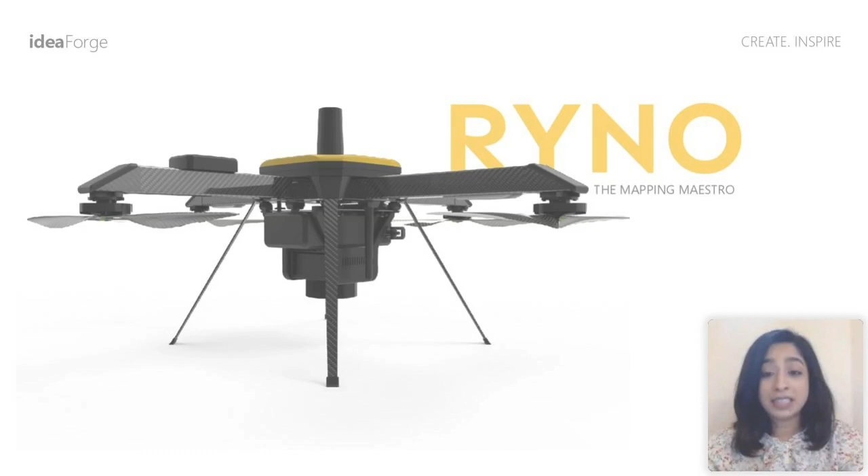Welcome once again, everyone, to this very exciting launch for us. And when I reflect back, I look at the timeline way back in 2004, when we had created our first quadrotor drone as an exciting, innovative, and fun project while we were still college students, to the next few years where we set out to prove that such a technology can be created by people right here from scratch.

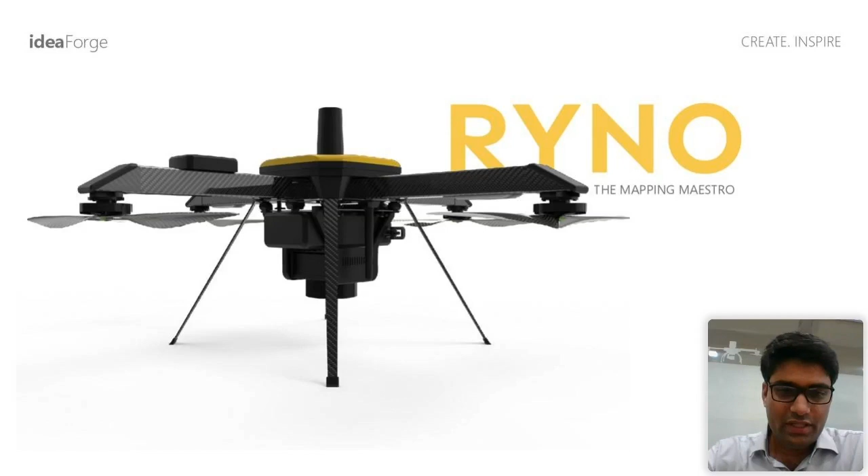But in 2008, when the Mumbai attacks happened on 26/11, it ignited a passion in us to use this technology to create a difference in our security operations. Over the next few years, ideaForge pioneered and delivered several class-leading performance products to various forces in the country. Almost all of the forces have adopted our indigenous solution, and have been successfully using it in over 140,000 missions for their operations. Several missions have been wildly successful in creating impact for our forces.

When we were looking at the next frontier for us, we realized that there was a burgeoning demand for survey-grade mapping drones.

And when we investigated that further, we came across a very exciting study done by a very famous Peruvian economist, Mr. De Soto, who mentioned that the development of several modern economies is going to be dependent in a big way on how well digitized their land records are.

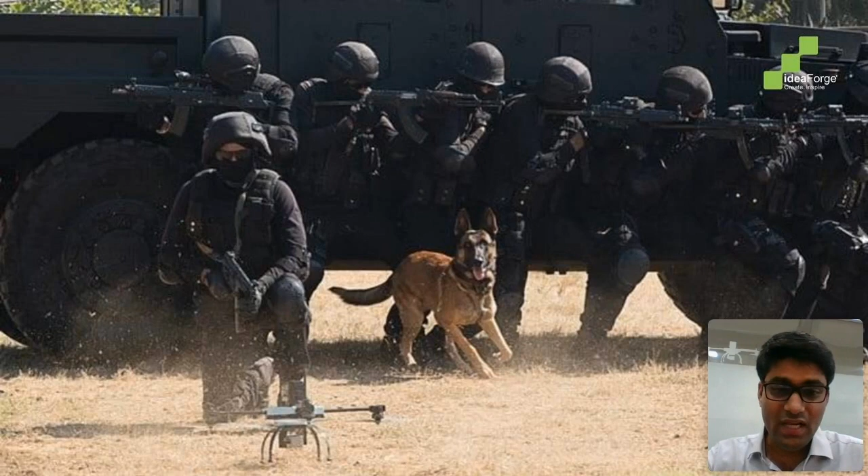And when we saw the impact of this technology, we knew that this was the path we had to choose next to create impact. It is one of our core values at ideaForge. As a result of our dedicated effort over the last 6 to 9 months, we are proud to present our mapping maestro, RYNO. I would now like Rahul, my colleague and co-founder, to share what makes RYNO special.

Hi, welcome back. Thank you, Ankit, for the narration so far. What I would like to do is start by talking about the design philosophy behind the product RYNO.

As Ankit mentioned, this was a realization that there was a latent demand for a high accuracy, survey grade mapping drone, which could be made small enough, accessible enough, portable enough so that our target user is able to achieve its mission flawlessly, scalably, reliably, repeatably.

With that mission in mind, we had to dabble with the challenge of making something that was regulatory compliant, achieving consistent high accuracy performance as the user required, and while doing so giving scaled performance so the user was able to do more of the mission required, because what the Survey of India in our country is targeting is nothing short of phenomenal in terms of a goal. So we worked around this problem and came up with a product.

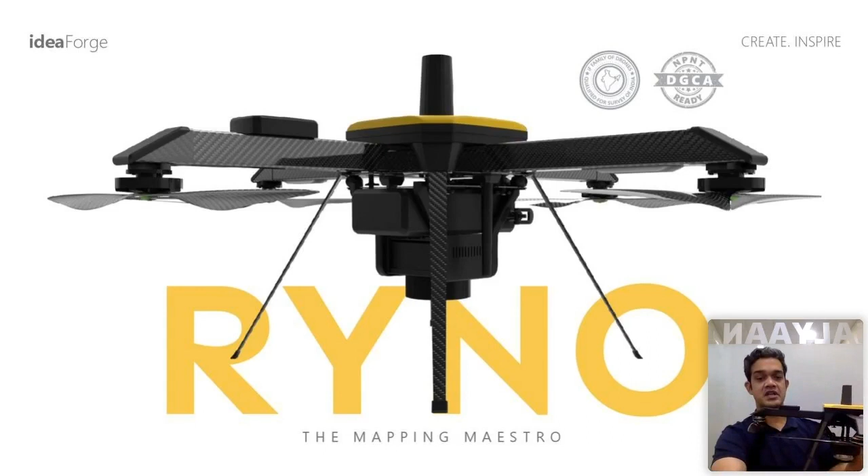And I would also like to show you the physical incarnation of the product RYNO, probably one of the only RYNOs in the world that I can lift so easily. But jokes apart, this is a sturdily built product. I would like to walk you through some of the specifications of the product.

I'll bring back the equipment wherever I need to give you references of what this product represents. So the product, in terms of broad specification, is an under 2 kg product. As per Indian regulations, that's classified as a micro UAV. The advantage of a micro UAV in the Indian operational environment is that as long as the user is operating it under 60 meters, there is no UAOP requirement.

Because of that, more operators can scalably do this without necessarily going through the additional step of obtaining a UAOP. At under 2 kgs, the product still does not make the user compromise on any of the performance parameters. The product can fly for more than 40 minutes at one go.

While flying for 40 minutes at 60 meters AGL, at 80-60 frontal and side overlap, the product can easily cover an area of 0.6 square kilometers or more. For users who have a UAOP, or do not have the restrictions of the Indian regulatory environment, or for international users, while flying at 120 meters, the product can easily cover more than 1 square kilometer at one go.

And while achieving all of this, it's always assuring accuracy of less than 10 centimeters in the horizontal axis and less than 20 centimeters in the vertical axis, with a 95% confidence interval. That 95% confidence interval means that if you have large data sets, no more than 5% of your data statistically will be outside these assured error percentages. What that means for our user is being able to do scaled operation without doubting the quality of the data achieved.

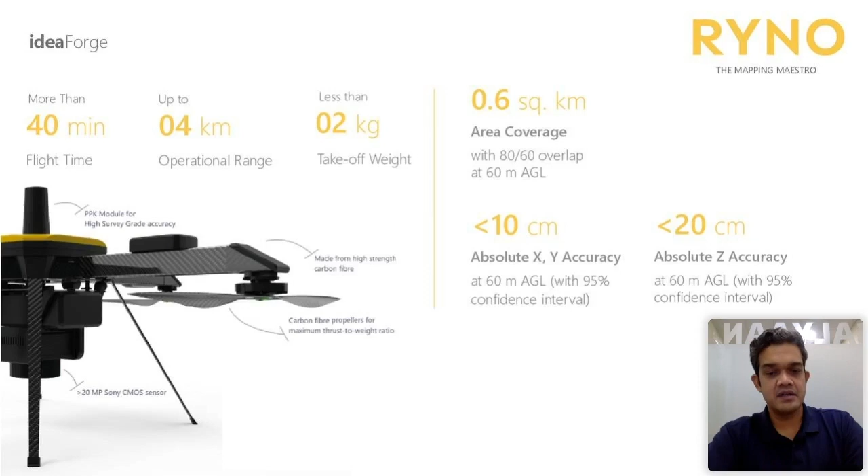Going ahead, I'd also like to highlight a bunch of great features of the product. The ideaForge family of survey-grade mapping drones, not just in the micro category but also the small category, are qualified by Survey of India to meet the stringent accuracy and repeatability requirements.

That means any customer, be it private or public sector player, can take this tool and produce data which is consistent and compliant with the requirements of any stringent agency.

The product also offers best-in-class area coverage. Because of the phenomenal endurance for this size class, the product is able to cover the maximum possible area for this size of UAV with this configuration. The area coverage can be flexibly increased for advanced users who want to play with overlap percentage and other parameters to maximize area coverage.

The accuracy that we assure, less than 10 centimeters horizontal and less than 20 centimeters vertical with 95% confidence interval, is a high confidence metric. But for a user looking for an average or typical accuracy, the same accuracies can be as good as less than 5 centimeters horizontal and less than 10 centimeters vertical.

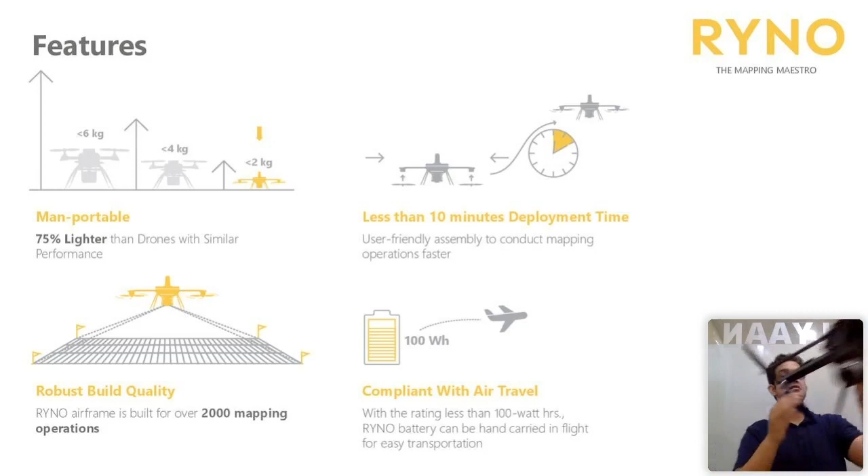The materials used in the product include an extensive amount of carbon fiber composite. In addition, there's a lot of magnesium and aircraft grade aluminum used to construct the product. All these materials are of the highest grade globally in terms of any product.

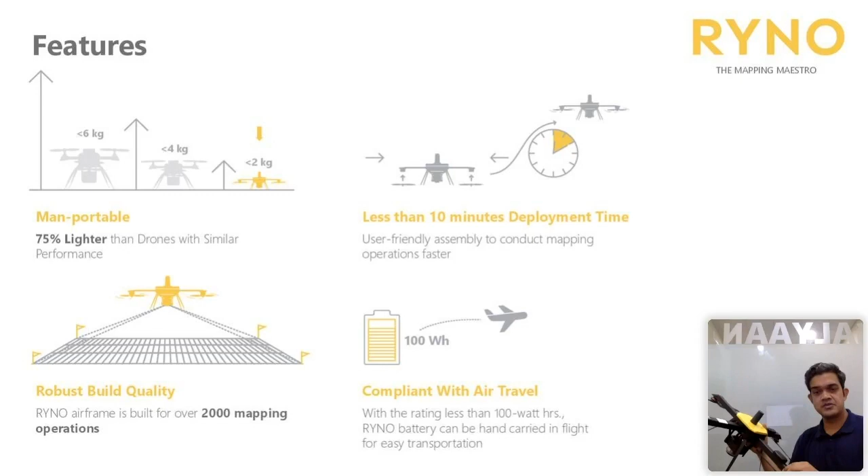That means, compared to a lot of plastic constructed commercial products, the product that RYNO makes can last much, much longer while assuring reliable and repeatable quality of output.

We assure technical life of the product as long as more than 2,000 mapping missions if the right engineering support package is followed and subscribed to. We also extend technical life support for many years, up to 5 years, depending on the engineering support package chosen, meaning the investment into the product is future secured by an assured lifetime technical support of up to 5 years or so, which no other commercial grade product typically offers.

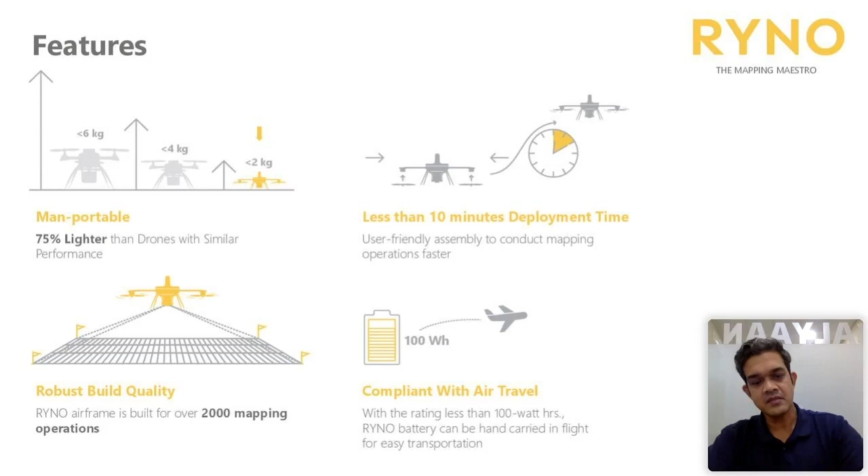While assuring high cycle life, high reliability and robust construction, we also provide very extensive and easily accessible customer support and warranty support for the product. We have pan-India operational support available, so most likely our nearest support center won't be too far away. The warranty package is typically 1 year, and beyond that, users can choose different AMC and support packages to suit their needs.

The product also takes into account the need of the user to travel between various mission areas by air transportation. So the main aircraft itself is made to be easily checked in. And as we all know, batteries are not allowed to be checked in by airline authorities, so the batteries have been constructed to be compliant and can be carried in cabin with you, allowing hassle-free transportation by air.

Further to that, we want to highlight the importance of a VTOL quadrotor configuration and its advantages compared to a fixed wing or hybrid configuration. The VTOL configuration offers tremendous flexibility in area of operation. The size of the deployment area required is minimal, increasing mission deployability significantly. In addition to launch and recovery flexibility, users also benefit from flexibility in flight.

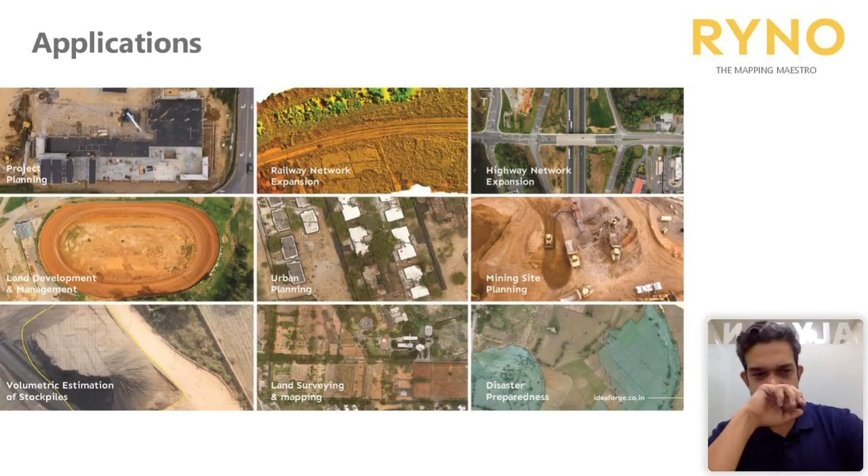Hi, thank you Ankit. So when we talk about the product being built for user's mission, we also need to talk about what the mission is. Broadly, the outcome of the drone flight itself is not a great video or entertainment—it is the data coming out of the drone, and the high accuracy data we assure is produced by essentially understanding the mission requirements.

So I would like to capture the mission requirements as, one, data processing, and the other, data capture. Data processing requires various photogrammetry tools which the user might have a pre-established preference for. So we provide compatibility with almost all popular third-party photogrammetry software in terms of data formats, which can be imported and directly processed to produce various outputs, each with relevance for different kinds of applications.

But more important than the data processing itself, where we're not claiming specific value addition, the data capture itself is where RYNO adds a lot of value. In the data capture process...

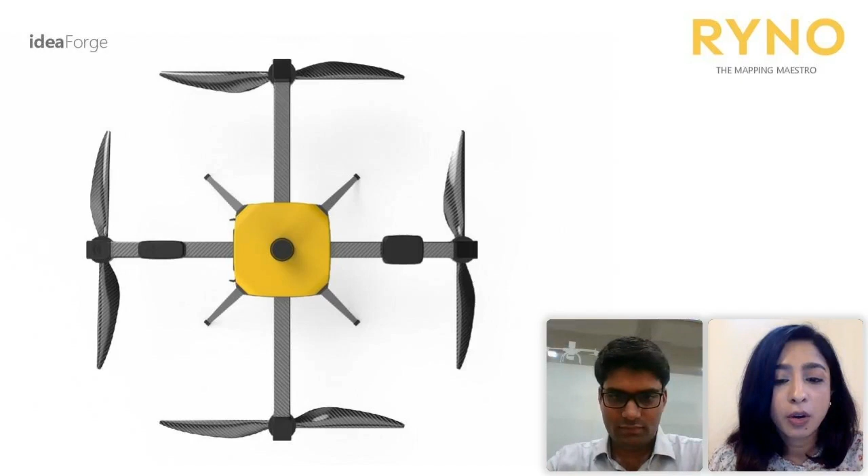One question that probably, Ankit, you could answer is, could you give us some insights into the warranty of the product, the flight, a little more into the customer support?

Kruti, I'll probably not spend too much time on it. Rahul has mentioned a little bit in detail about that, but just to reiterate, we support a year's warranty on the standard product, and there are various extended support packages available to support the guaranteed cycle life on the system that we have suggested. And of course, the system is built robustly and reliably, and we continue to provide technical support to our users for a very long period of time.

Kruti, you're on mute.

Thank you, Ankit. So we'll now watch RYNO in action. Just take a few minutes to load the video.

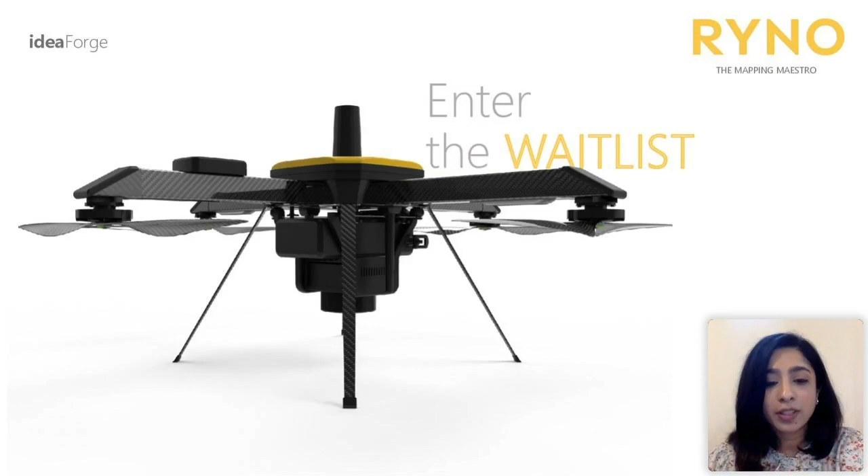So we will now open the floor for Q&A. I request Ankit and Rahul to just join us back.

Okay, so there are a lot of questions. I'm just struggling to follow up on which question to go for first. So let's just take it this way. What is the maximum temperature it can operate in? And is 40 minutes the max flight time?

Yeah, thank you. So the temperature ranges that we support in this product, it's a great question. I think I would have liked to cover this information earlier, but I somehow missed out covering it. So in the process of making the product robust, what we've also ensured is we have designed the equipment to work in the widest range of temperatures that our geography offers. And so the product is rated to operate from minus 10 degrees centigrade to plus 50 degrees centigrade. So that covers majority of the climatic conditions that most surveyors will experience in most parts of the country.

In addition to that, we also have tested the equipment for dust and drizzle resistance. What that does is that in real life conditions, you don't have control over when it starts to rain or when there is a dust storm or things like that. The equipment should not deteriorate a lot because of such climatic conditions. So the product is designed to continue operating in all of these environments.

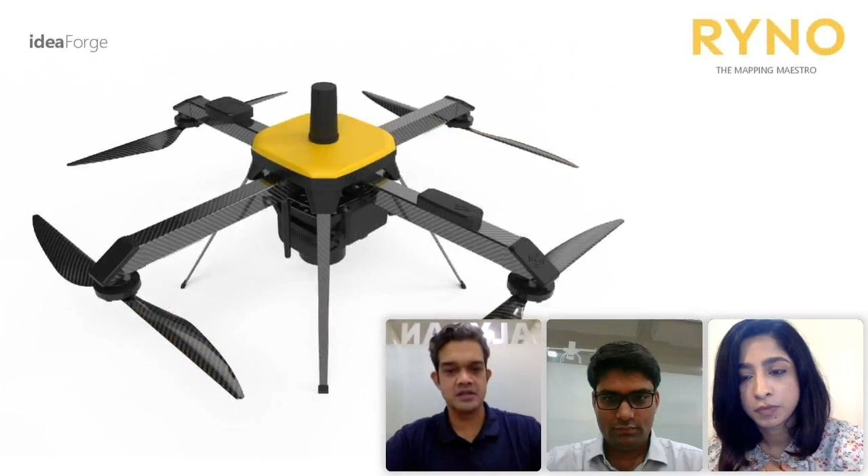Sure. In trying to make any new product, we try to inherit all the safety features we have developed over time in our military grade products as well. So the product comes standard built in with battery fail-safe, communication fail-safe, high wind fail-safe, GPS error-based fail-safe, battery health-related fail-safe, or any other sensor related fail-safe. The most commonly used fail-safes a user might encounter would be the communication fail-safe and the battery fail-safe.

A communication fail-safe is something you can't really plan around because of the crowded wireless environments we operate in, and today creating a jamming environment is not the toughest scenario. So even if communication gets lost because of any unforeseen scenario, the aircraft will always come back to the takeoff location and land by itself, even if there's no control.

The battery fail-safe is also very important because while flying, you don't really need to actively think about how much battery is left and when to start landing. The battery fail-safe we've built into the equipment is an intelligent one, which takes into account the flying parameters along with the battery health itself to decide when to start landing and come back, finishing the landing completely in time with enough safety buffer, so the equipment never runs out of battery in flight.

In addition, some of the other safety features in the product - you will rarely see any wire that the user can experience. Most of our products, from a user experience perspective, have no wires anywhere. In most other products made by other companies, the wire required to assemble and operate the product is a source of failure. So we've taken the pain and penalty of making the product as finished as possible for the user, while still remaining under 2 kg and ensuring the performance that the user requires.

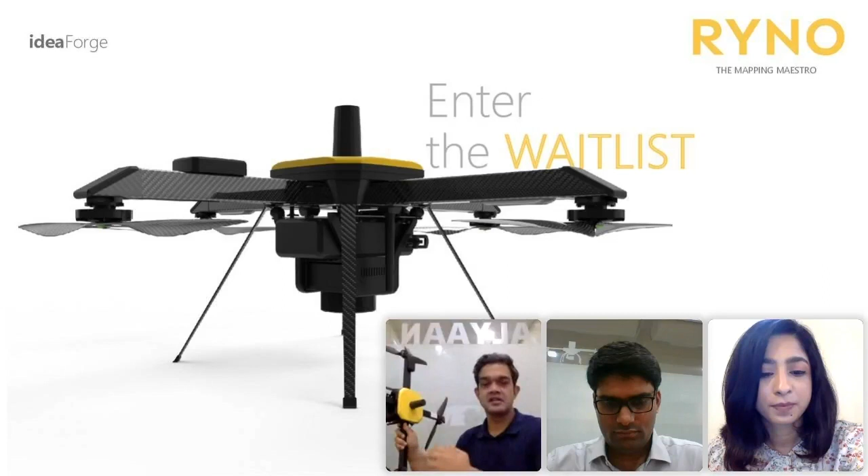Apart from the camera, on the top you have the PPK antenna positioned in the middle of the equipment, assuring high-grade GPS reception and hence high-grade GPS accuracy as well. I think some people mentioned they would like to see more hands-on with the product live on camera - so anything specific you would want to talk about?

Some people have asked why the propellers and motors are down-facing and not above. There are various advantages and disadvantages of the configuration. I won't go into the specifics of design choices here, but you'll see this as a signature element in a lot of our products. It comes at the cost of a lot of constraints, but if used well, it can have some advantages. So I'll just limit it to that.

So yeah, you have RYNO, our latest and greatest product. As Kruti says, flies like a bird, tested like a tank. So that's what it is.